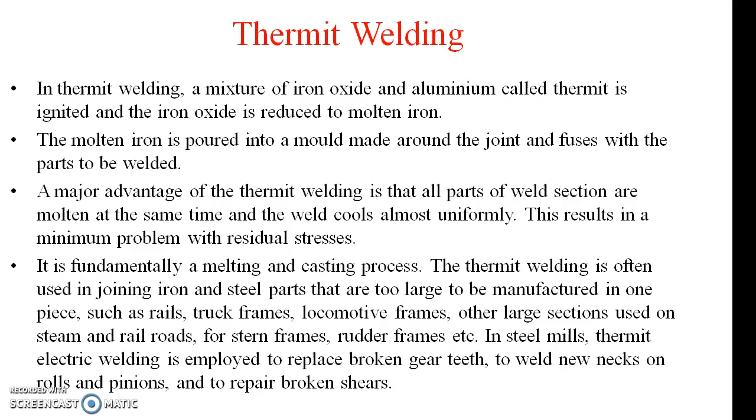This thermit welding is usually used in railway tracks. The next slide shows thermit welding: to join two railway tracks, we have to weld this track and this track also, so here we can use the thermit welding process.

This thermit welding is extensively used in railway tracks, truck frames, big industries, or thermal industries. This photo shows the thermit welding process, which is basically a kind of casting process. This is the thermit welding machine.

So according to our design and concept, we can weld by thermit welding in our railway tracks, truck frames, or big industries, etc. So next is our gas welding.

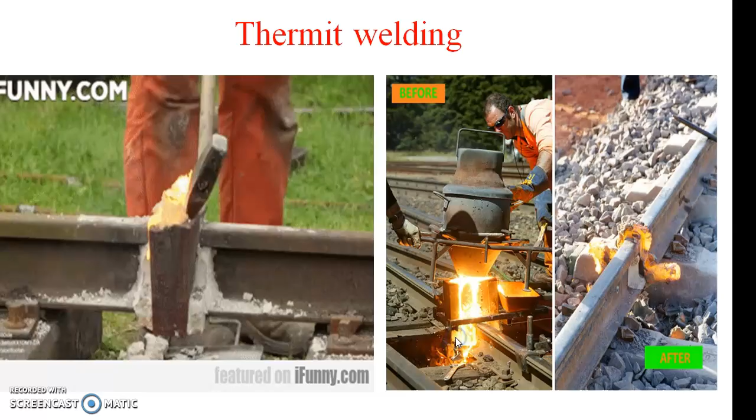What is gas welding? Gas welding looks like this. Gas welding is done by applying the flame of an oxyacetylene or hydrogen gas from a welding torch upon the surfaces of the prepared joint.

In gas welding, the most important factors are the gases: first oxygen, and second acetylene. The acetylene is the fuel gas, while the oxygen gas helps that gas to be welded.

The intense heat at the white cone of the flame heats the local surfaces to fusion point, while the operator manipulates a welding rod to supply metal for the weld. A flux is used to remove the slag. Since the heating rate in gas welding is slow, it can be used on thinner material. So basically gas welding is used for joining thinner materials.

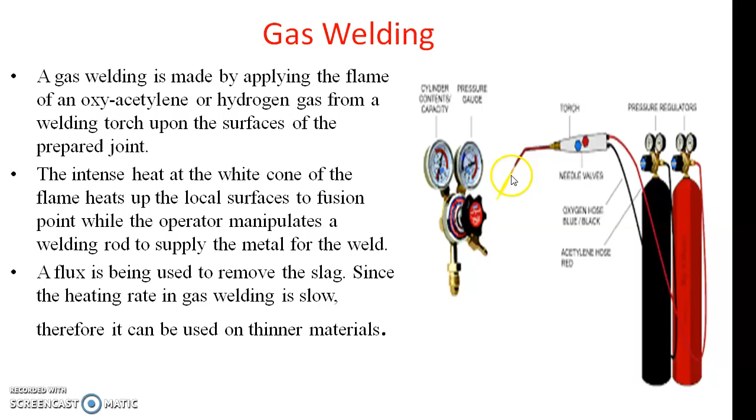See how the gas welding process occurs. This is the torch. We have to join this and this together, so we can use the gas welding process here also. So this is all about our gas welding process.

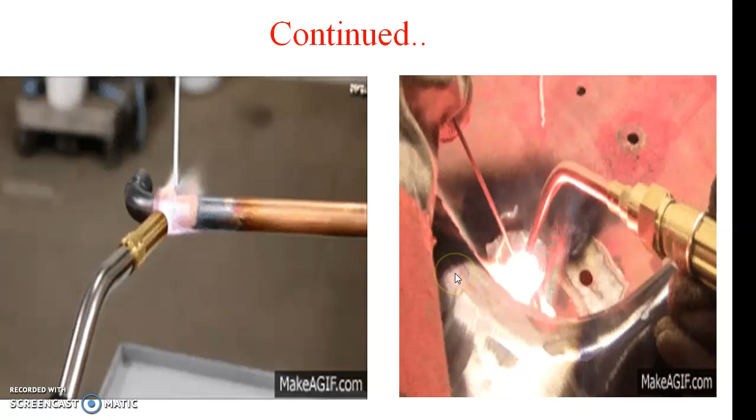The next is electric arc welding. What is electric arc welding? In electric arc welding, the work is prepared in the same manner as for gas welding. In this case, the filler material, or molten metal, is supplied by the metal welding electrode.

The operator, with eyes and face protected, strikes an arc by touching the base metal with the electrode. The base metal in the path of the arc stream is melted, forming a pool of molten metal which is forced out of the pool by the blast from the arc. A small depression is formed in the base metal, and molten metal is deposited around the edge of this depression, called the arc crater.

The slag is brushed off after the joint has cooled. Arc welding does not require the metal to be preheated, and since the temperature of the arc is quite high, the fusion of the metal is almost instantaneous. So this is all about the process of electric arc welding.

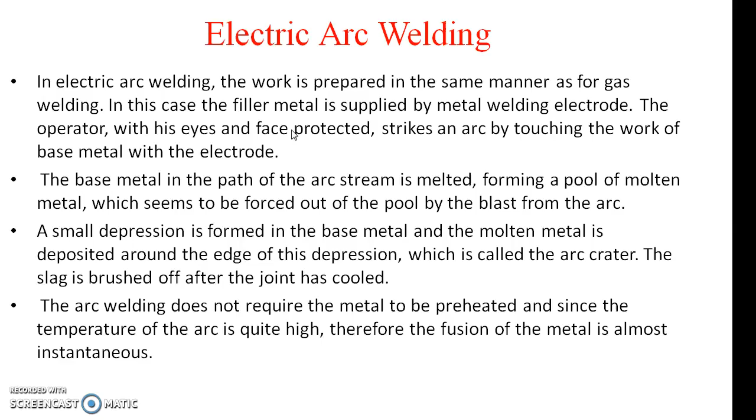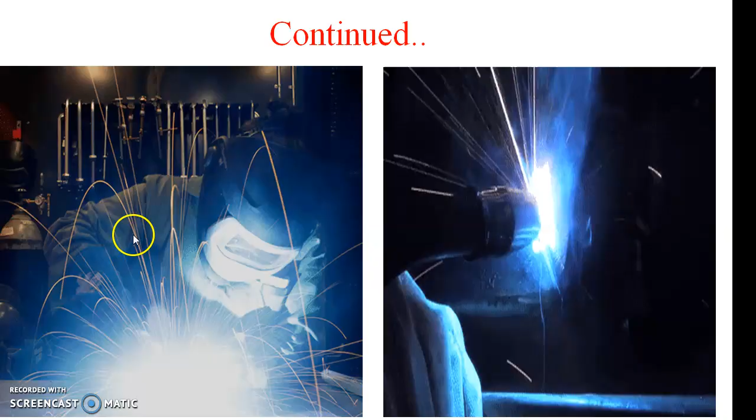So here we can see how electric arc welding occurs. Here is the arc. This is not gas, nor thermit molten metal; this is the arc, which welds two metals together.

Nowadays electric arc welding is used extensively, because in this welding no molten metal is required, no acetylene gas is required, no oxygen gas is required—only the power source, our electric supply, and a welding box, from which we get our electric arc.

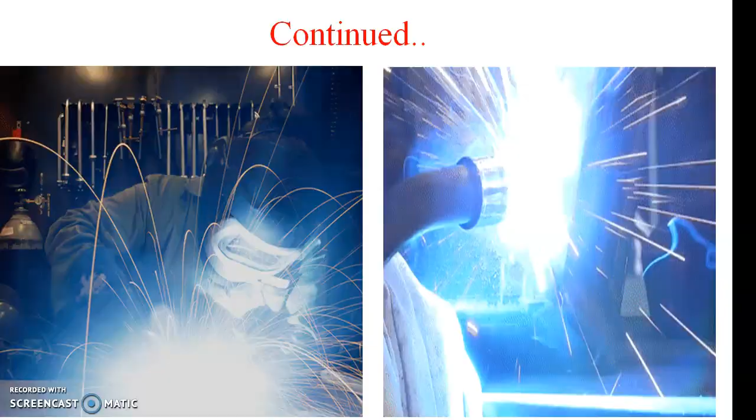So next is our forge welding. Thermit welding, electric arc welding, and gas welding are categorized as fusion welding. But what is forge welding? In forge welding, the parts to be joined are first heated to a proper temperature in a furnace or forge.

Electric resistance welding is an example of forge welding. In this case, the parts to be joined are pressed together and an electric current is passed from one part to the other until the metal is heated to the fusion temperature of the joint.

The principle of applying heat and pressure, either sequentially or simultaneously, is widely used in processes known as spot, seam, projection, upset, and flash welding. So this is all about forge welding.

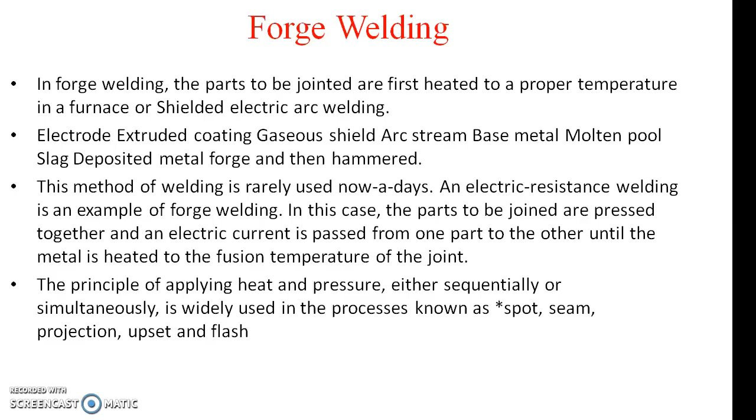Forge welding is rarely used nowadays, but we have already seen that in Rajasthan areas, bangles are produced using this forge welding process.

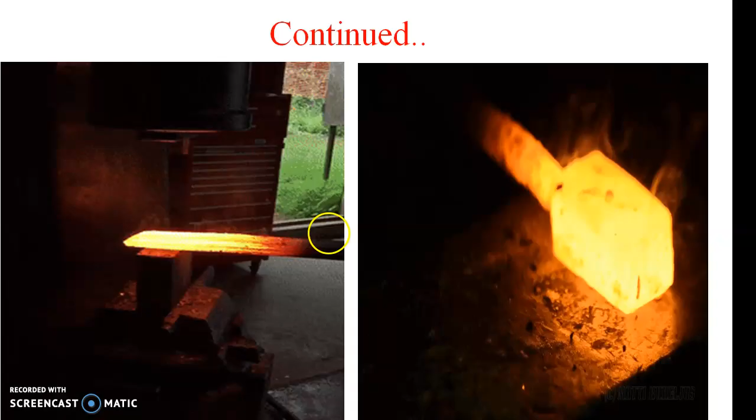Here temperature is needed, then pressure is needed. The pressure is applied to shape the metal according to our required shape or project requirements. The next video also shows a forge welding process.

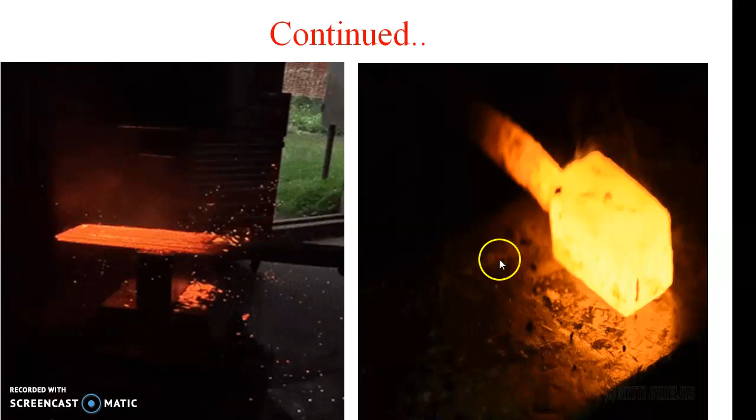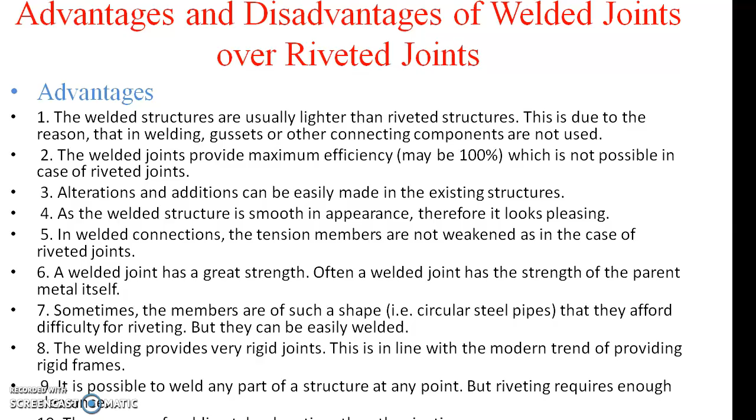So next is advantages and disadvantages of welded joints over riveted joints. We know that both are permanent fastening elements, the welded joints as well as the riveted joints. But such joints have advantages and disadvantages also. So here...